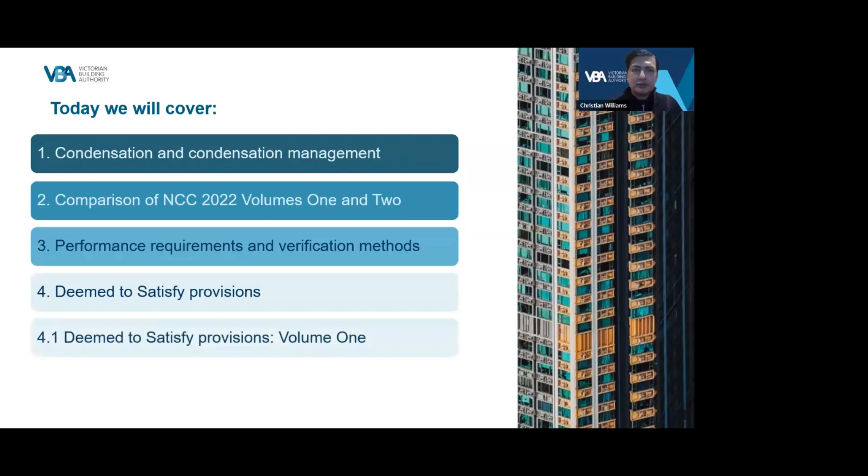Before we take you through the condensation management requirements, we need to mention one of the main changes to the NCC, which is the new SPTC referencing system. To help improve the readability of both volumes, the Australian Building Codes Board, or the ABCB, have come up with what they call SPTC, which stands for section, part, type, and clause, which can be seen on the left side of the slide. Anyone who's familiar with Volume 2 should know that Section 2 used to contain the performance requirements, and those two sections have now been combined into one section called Section H.

Essentially, the aim for this change is to make all volumes in the NCC consistent. To quote an example on the right side of the slide, we know Volume 2 is designated Section H, which is for Class 1 and 10 buildings. Sections are then divided into parts. A section can have multiple parts dealing with different aspects relating to that section. In our example, it's Part H4 to do with health and amenity.

The type can be one of 7 options, as shown on the left side of the slide. This can be the governing requirements, performance requirements, objectives, functional statements, verification methods, deemed to satisfy provisions or specifications. In our example, the type is D, which stands for deemed to satisfy provision. The clause is always a number. In our example, the number is 9. So when I go to that reference H4D9 in Volume 2, it'll give me the deemed to satisfy provision for condensation management.

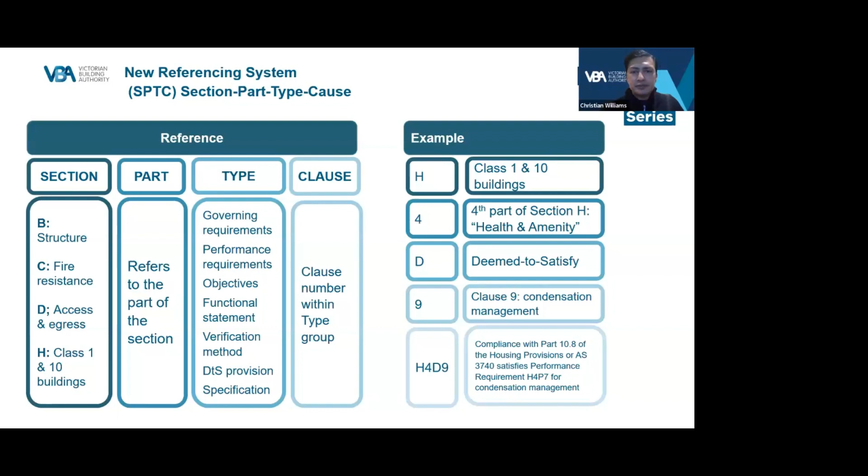For the first part of this webinar, we're going to briefly discuss condensation and its management. Condensation is an event which reveals the presence of water vapour in the atmosphere, and in this particular case, in the context of buildings. The NCC defines condensation as the formation of moisture on the surface of a building element or material as a result of moist air coming in contact with the surface at lower temperature.

When the resulting water vapour from condensation is unable to dry as readily as it forms, it can accumulate to cause problematic wetting in buildings, which can result in the growth of mould or the deterioration of building elements. In dwellings in particular, the daily activities that occur, such as cooking, washing, showering, bathing, and laundry, release water vapour. Furthermore, people release more water vapour into the air just by breathing and transpiration from the skin. All this water vapour accumulates in buildings and needs to be released to assist in reducing the likelihood of excessive condensation. This is because mould growth can be stimulated at relative humidities above 70%.

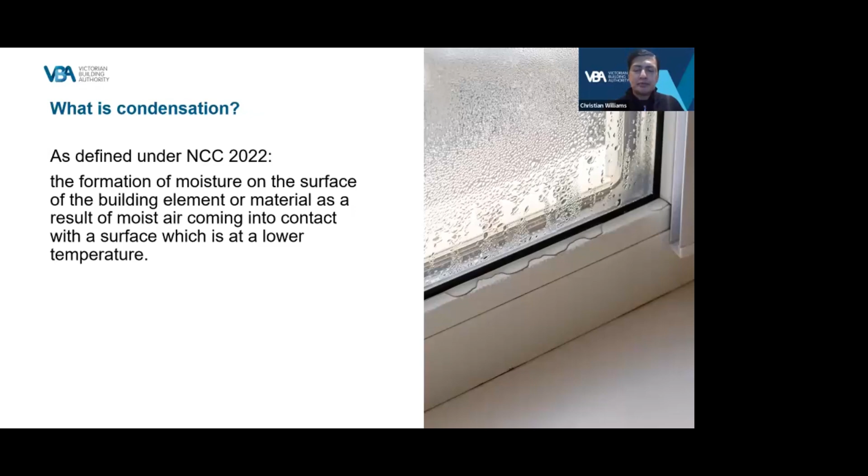With the increase of building sealing in recent times, it has become necessary for the NCC to include requirements to mitigate against the accumulation of excessive condensation. The Australian Building Codes Board, or ABCB, commenced a project starting with the new condensation management provisions for NCC 2019 in an attempt to reduce the presence of condensation and mitigate its effect on buildings. This is a continuing project which is progressively implementing new condensation management requirements to the NCC as more research and information becomes available.

The condensation management provisions of the NCC aim to decrease the risks of condensation and water vapour to the health and amenity of occupants of residential buildings only. The condensation management requirements apply to Class 1 buildings, Class 2 sole occupancy units or SOUs, and Class 4 parts of buildings, and are contained in both Volumes 1 and 2 of the NCC. It is important to note that the installation of a condensation management system may not necessarily prevent condensation from occurring and is mostly in place to mitigate its effects.

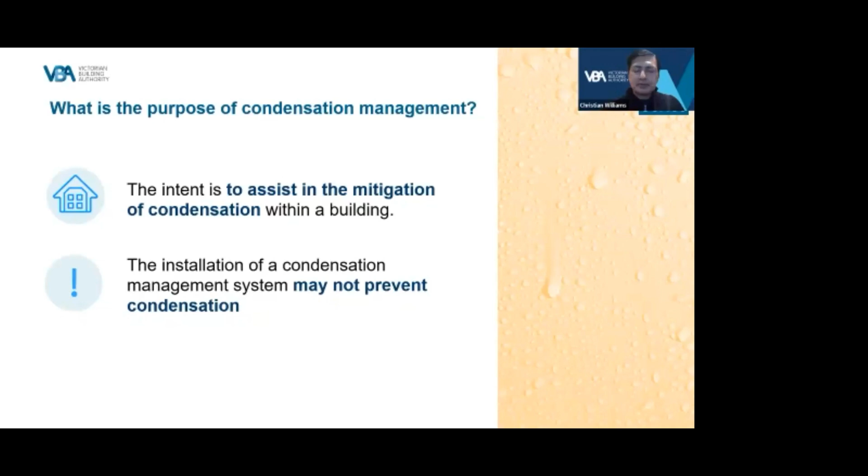Before we get into discussing the changes for NCC 2022, it's important to point out that most of the changes with respect to condensation management are identical between Volumes 1 and 2, but with some slight variation. As most of the changes for Volume 1 and Volume 2 are identical, we will not be going over the changes twice, and we will be covering most of the requirements from a Volume 1 perspective, but also outlining where these changes occur in Volume 2. So for those of you who are only interested in the requirements for Volume 2, take note, as most are the same. However, we'll now provide a brief comparison between volumes, showing where these differences occur.

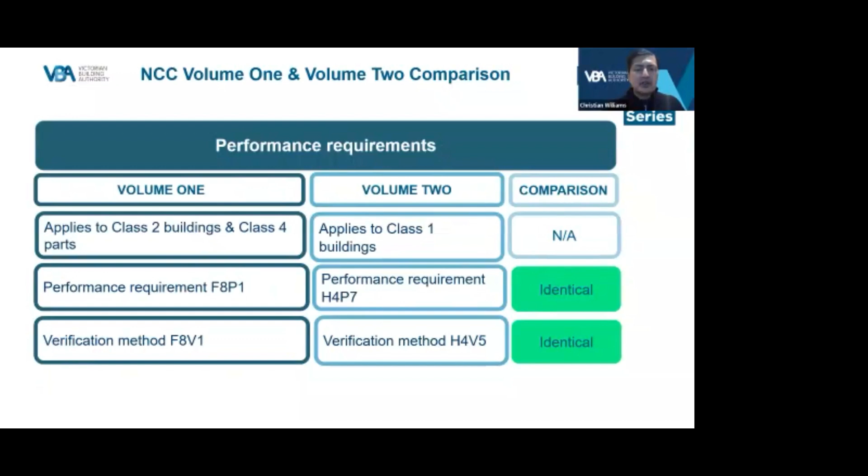The table on the slide compares the building classes, performance requirements, and verification methods of Volume 1 and Volume 2. You can see in the third column and highlighted in green that the performance requirements and verification methods are identical for both volumes for NCC 2022. This table compares the DTS provisions for NCC 2022 in Volume 1 and Volume 2 under the ABCB Housing Provisions Standard 2022. You can see in the first row the requirements for external walls that relate to pliable building membranes, and that the requirements for both volumes are again identical, highlighted in green in the third column.

The second row on the table compares the DTS requirements for exhaust systems for NCC 2022. You will note, as highlighted in yellow in the third column, there are some slight differences between Volume 1 and Volume 2 with respect to the requirements for exhaust systems. The first difference is that under Volume 1, where a space for a clothes-drying appliance is provided, a space must also be provided for ducting the appliance to outside air. However, for Volume 2, you are only required to duct a venting clothes dryer where a venting clothes dryer is to be installed. So basically Volume 2 is reliant on a venting dryer being installed, whereas Volume 1 requires a space for the ducting where a space for a dryer is provided.

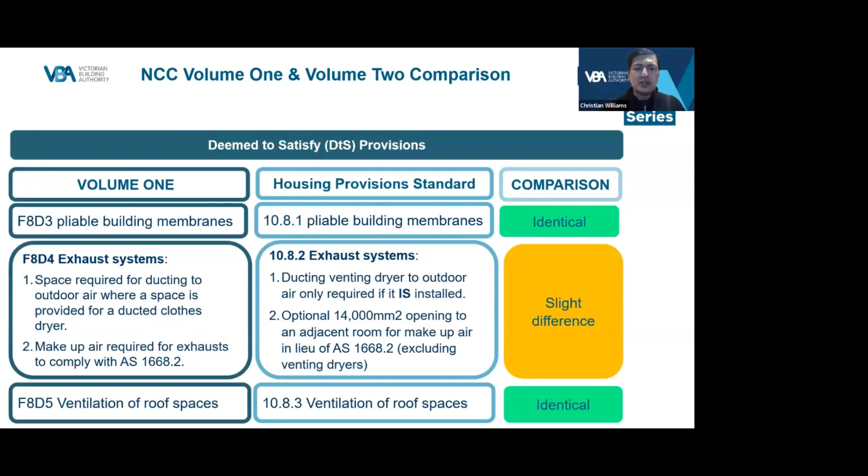We will now discuss the changes for NCC 2022 with respect to condensation management to be adopted on the 1st of May 2024, beginning with the mandatory requirements of the NCC, which are the performance requirements, and then onto the verification methods, which is one of the assessment methods under the mandatory provisions of the governing requirements under Section A of the NCC.

Under Volume 1 of the NCC, the performance requirements for 2022 have not changed much. Condensation management has been moved from Part F6 in the 2019 version to Part F8 for the 2022 version. The new performance requirement is F8P1 under the new SPTC numbering system, as we discussed earlier.

There is again only one performance requirement in Volume 1 for 2022, which has been rewritten slightly for clarity, with a separate application box noting that it only applies to a sole occupancy unit or SOU in a Class 2 building or a Class 4 part of a building. As discussed earlier in the...

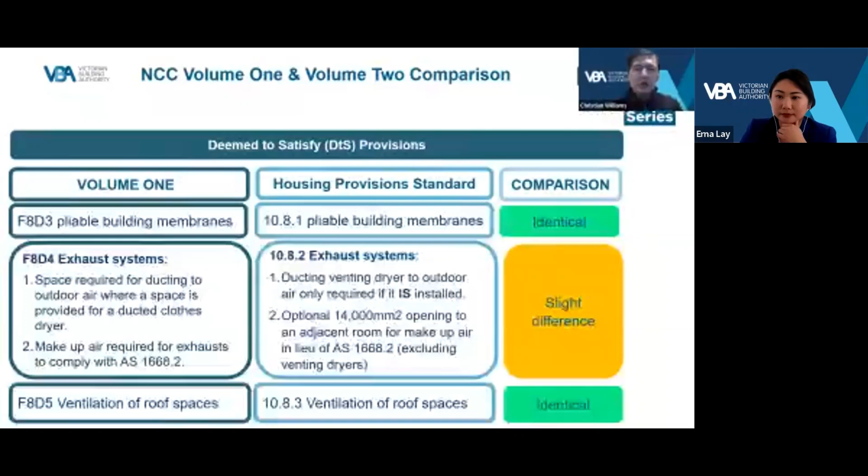Condensation management has been moved from Part F6 in the 2019 version to Part F8 for the 2022 version. Can you just pause it, Nandini? The slide's really blurry. Just play it again. The new performance requirement is F8P1 under the new SPTC numbering system, as we discussed earlier.

There is again only one performance requirement in Volume 1 for 2022, which has been rewritten slightly for clarity, with a separate application box noting that it only applies to a sole occupancy unit or SOU in a Class 2 building or a Class 4 part of a building.

As discussed earlier in the webinar, the performance requirements for Volume 2 used to be contained under Part 2. However, for the 2022 version of the NCC, the whole of Volume 2 is now called Section H. The condensation management provisions come under Part H4. And again, there is only one performance requirement under Volume 2, which is H4P7, applicable to Class 1 buildings only. There are no changes to this performance requirement for NCC 2022 other than the SPTC reference.

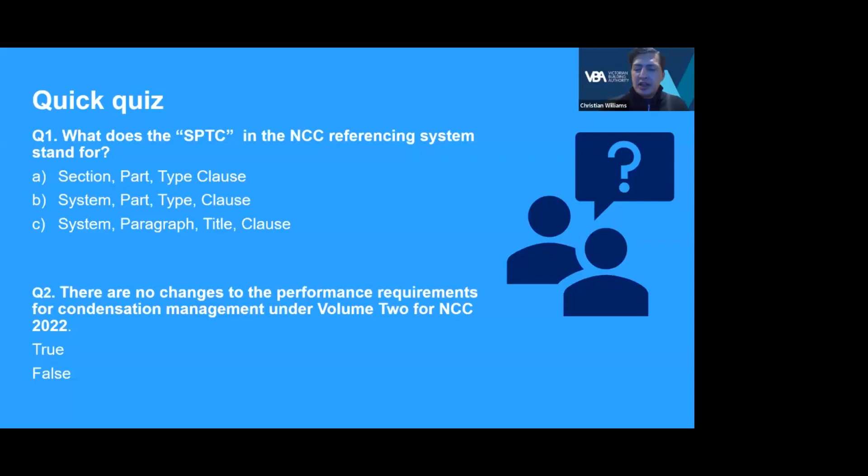So question 1, what does the SPTC referencing system stand for? The answer was A, section, part, type, or clause. Question 2, there are no changes to the performance requirements for condensation management for NCC 2022. Answer was A, true.

We now come to the main part of this webinar, which will discuss the changes to the deemed to satisfy or DTS provisions of the NCC with respect to condensation management. As discussed earlier, as the provisions for condensation management under Volume 1 and Volume 2 are almost the same, we will not be discussing the DTS provisions of Volume 2 in any great detail, and will instead only be identifying the changes under Volume 2, which are different to Volume 1.

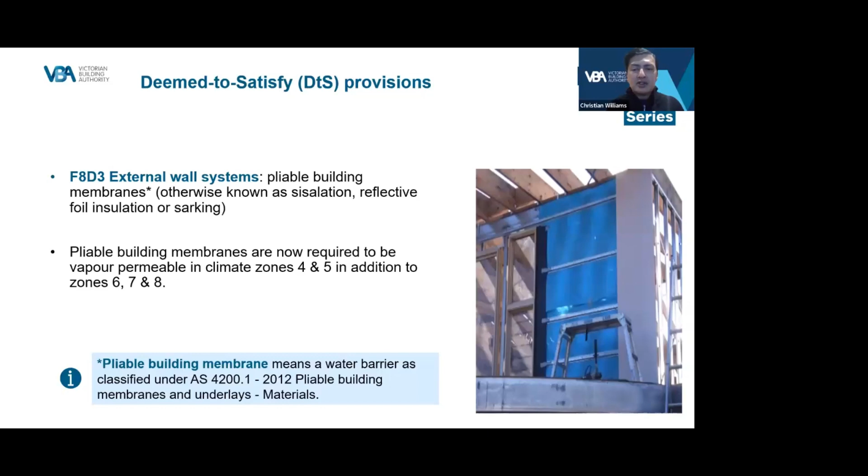For 2022, pliable building membranes are now also required to be vapour permeable in climate zones 4 and 5, in addition to climate zones 6, 7 and 8, which was originally required under the 2019 version of the NCC. So what does this mean for Victoria? We can see in the map on the screen that most of Victoria is in climate zones 6 and 7, as shown in the light and dark blue shading. And climate zone 8 is shown in the white areas. However, there are still some areas at the top of Victoria, such as Shepparton and Echuca, that are in climate zone 4, as shown in yellow at the top of the map. This basically means that a pliable building membrane is required to be vapour permeable throughout all areas of Victoria.

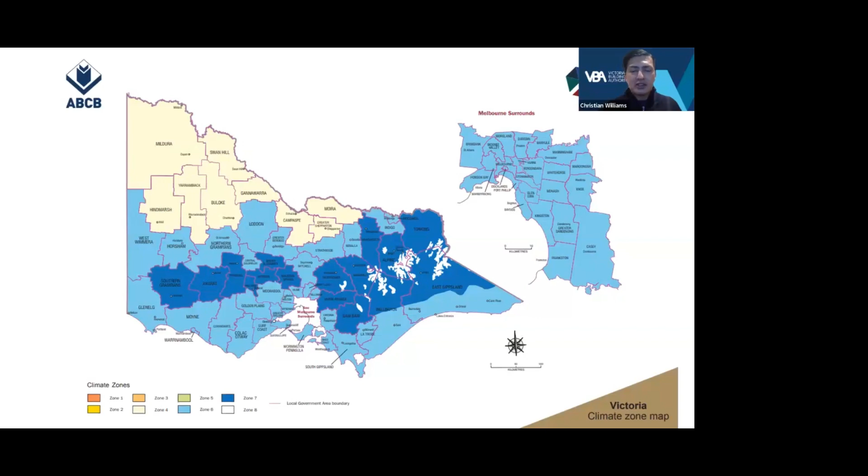The requirements for climate zone 4, shown in the yellow shading, can be met by installing a Class 3 or 4 vapour control membrane as defined under AS 4200.1 and installing it in accordance with AS 4200.2 2012. A Class 4 vapour control membrane will satisfy the requirements for climate zones 6, 7 and 8 as shown in blue and white. The figure on your screen shows a typical installation of a pliable building membrane, which is shown in red, with a direct fix cladding system, which is considered to be the primary water control layer. This example shows a Class 3 vapour control membrane, which would satisfy the requirement for climate zone 4, which is around the top of Victoria as shown in the previous map.

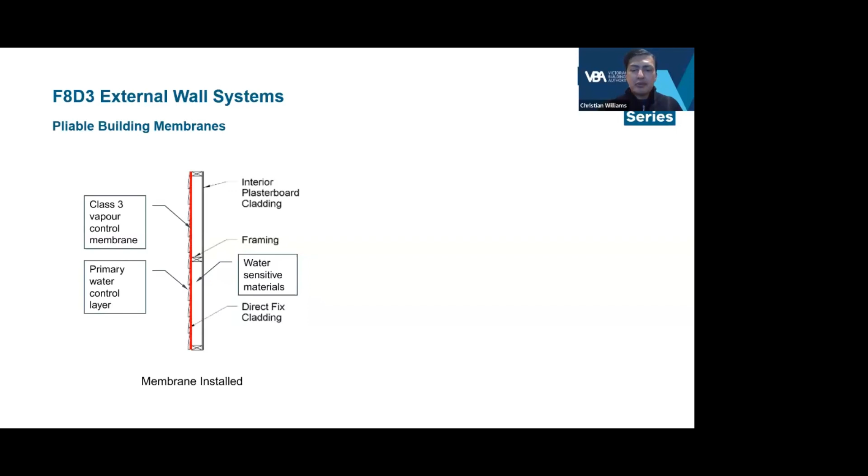Drawing your attention to the second figure on the slide, as a vapour permeable pliable building membrane is required throughout Victoria, where a pliable building membrane is not installed, the primary water control layer, or the masonry in this example, must be separated from the water sensitive materials, such as the timber frame, by a drained cavity. The intent of this clause is to ensure that when no wrap or sarking material is used, a drained cavity is installed between the primary water control layer and any water sensitive materials. This clause is not intended to allow substitutions where untested vapour permeable materials are installed instead of a pliable building membrane. This means that untested vapour permeable materials should not be used, as there is a potential for condensate to accumulate and damage the water sensitive materials.

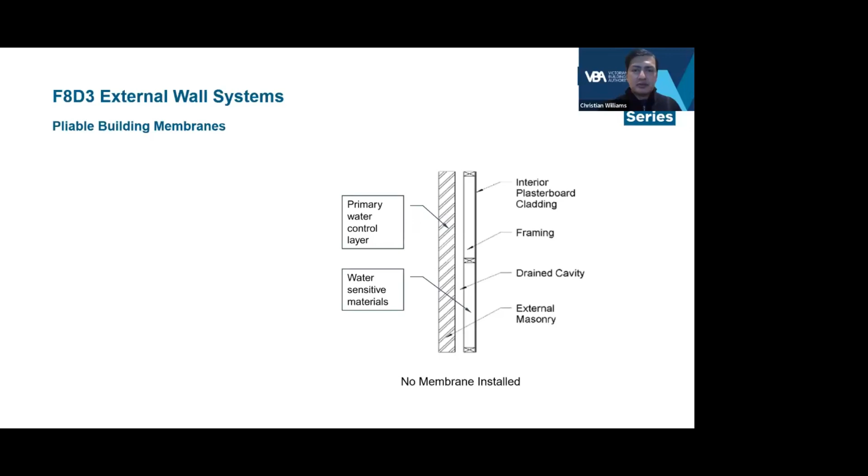There are a number of important changes to note for exhaust systems under F8D4 for NCC 2022. While the flow rates for exhausts remain the same, there are new discharge requirements that apply. Exhausts from bathrooms, sanitary compartments, and laundries can no longer discharge into a ventilated roof space, and all these exhausts, including kitchen range hoods, must now be discharged directly to outside air via a shaft or duct. It's important to note that the installation of exhaust ducts to outdoor air must be carried out by a licensed plumber.

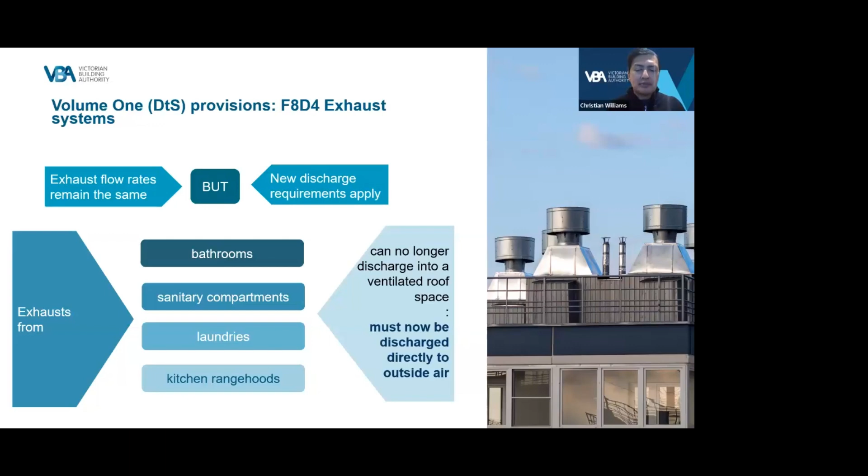Under clause F8D4, where a space for a clothes drying appliance is provided to satisfy the requirements for laundry facilities under Part F4, a space must also be provided for ducting the appliance to outdoor air, and make-up air for the exhaust must be provided in accordance with Australian Standard AS 1668.2 2012, The use of ventilation and air conditioning in buildings – Mechanical ventilation in buildings.

The exception to providing an exhaust system and make-up air is where the room has natural ventilation in accordance with clause F6D7, or where a condensing type dryer is to be installed, as they capture the water vapour as the clothes dry and condense it into liquid water that can be disposed of.

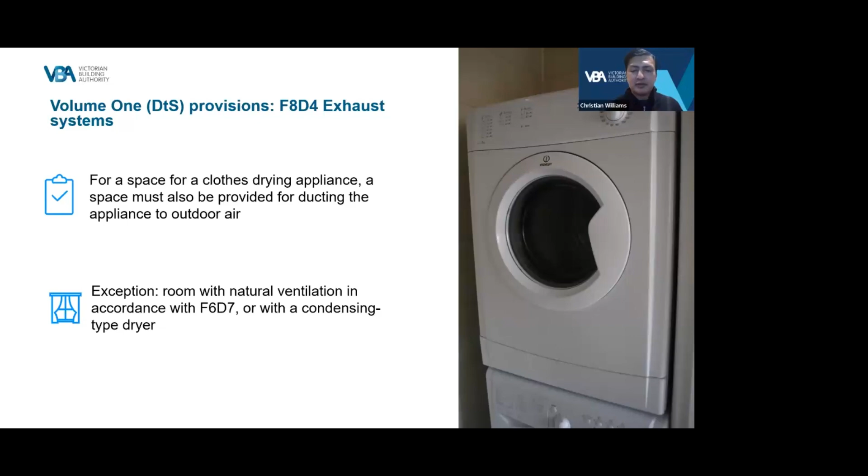The final important change for exhausts under F8D4 is where an exhaust system is used to ventilate a bathroom or sanitary compartment in lieu of natural ventilation, and that exhaust does not run continuously. In this case, the exhaust must be interlocked with the light switch and operate with a run-on timer so that the exhaust will run continuously for at least 10 minutes after the light switch has been turned off.

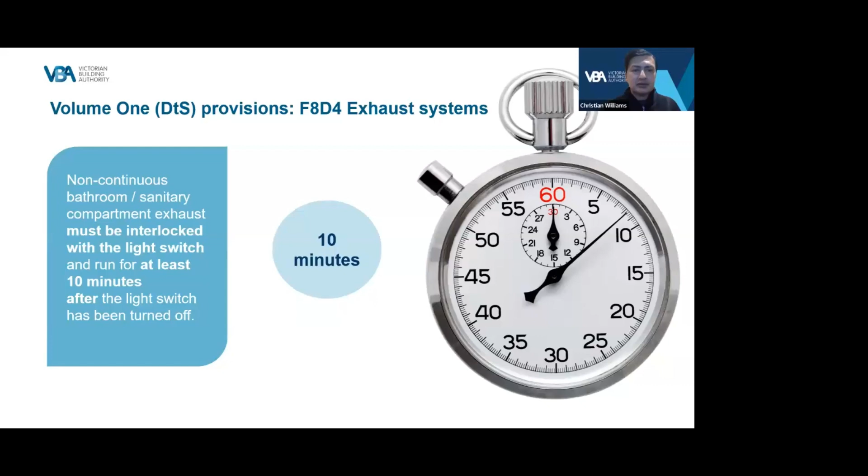The last change under Volume 1 is in relation to the ventilation of roof spaces. Currently, under the 2019 version of the NCC, roof spaces are only required to be ventilated where an exhaust system is discharged into the roof space. However, for NCC 2022, the ventilation of the roof space is a mandatory requirement for climate zones 6, 7 and 8, which is most of Victoria and is shown in blue and white shaded areas on the climate zone map on the screen.

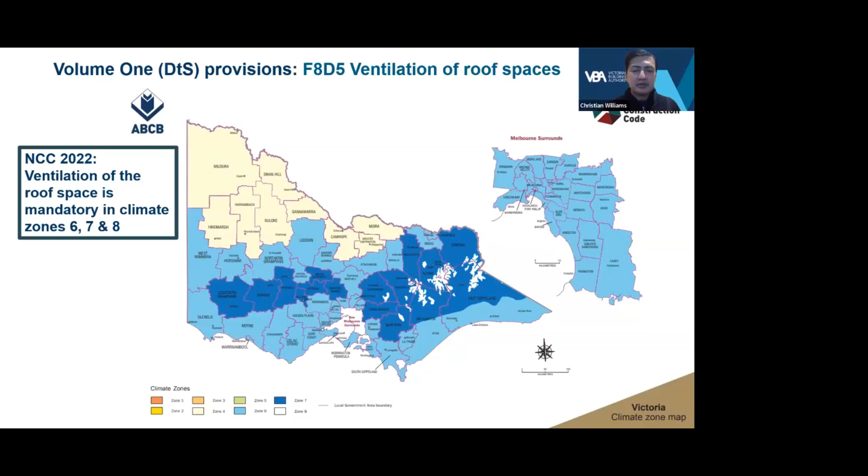Clause F8D5 requires that the roof space must be above the primary insulation layer, which under the definition in the NCC is the most interior insulation layer of the roof, or the roof space must be above sarking, which is immediately above the primary insulation layer, or the roof space must be above ceiling insulation that complies with the energy efficiency requirements under Part J3 of Volume 1.

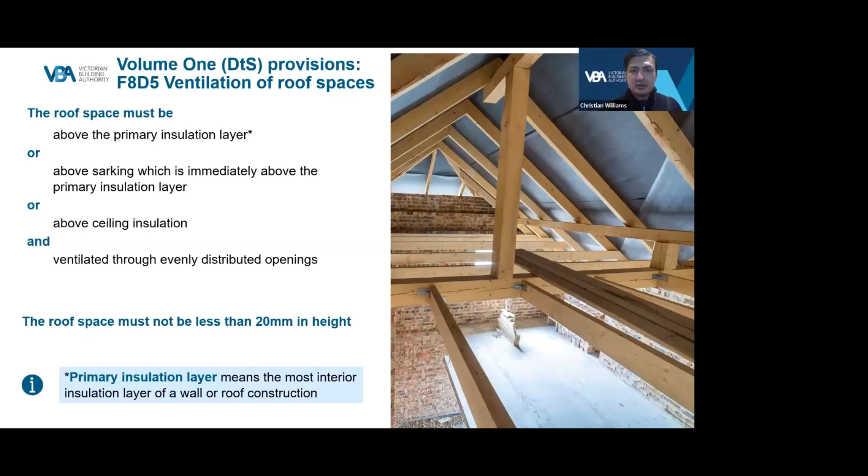The roof space must also not be less than 20 millimetres in height, and the roof space must be ventilated through evenly distributed openings. Alternatively, the roof space may be directly beneath a tiled roof if no sarking is installed, in which case no additional ventilation will be required. The requirement to have a ventilated roof space is also not applicable to a concrete roof, insulated structural roof panels such as reinforced EPS concrete, or roofs required to be built to bushfire attack level FZ requirements.

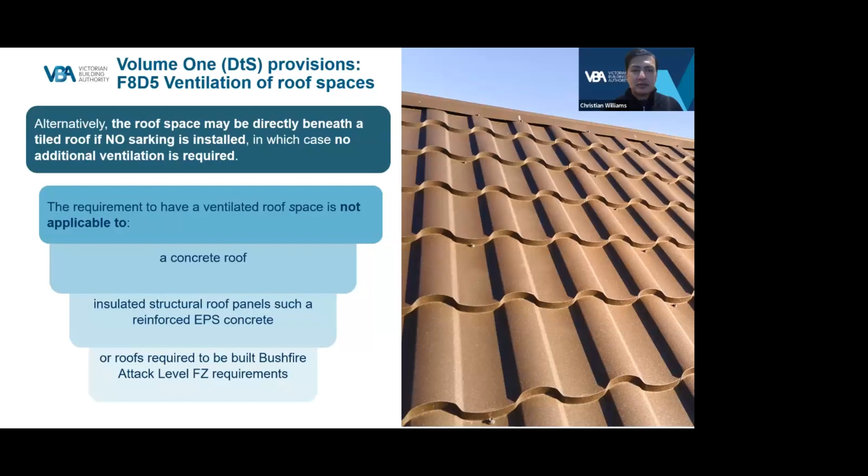Where the roof space is required to have evenly distributed openings, the requirement specifying the amount of ventilation and its placement is based on the roof pitch, as you can see in the extract from table F8D5 on the left of the slide. The figure on the right of the slide is an extract from the NCC, showing that the 20mm gap for the minimum required roof space must be maintained between the ceiling insulation and the roof sarking, and shows a typical eaves vent.

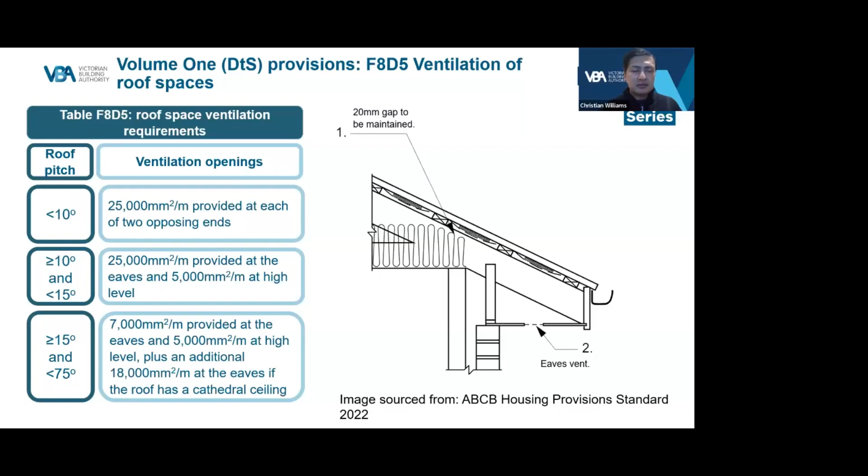We're now going to go through a very basic example of calculating the roof space ventilation requirements using table F8D5 for a roof pitch between 15 and 75 degrees. We'll be using two vent types in this example, as can be seen in the middle box at the bottom of the slide, which are eaves vents and ridge vents for high level vents. These are required to be within 900mm of the top of the roof or the ridge. Please note that the free opening area of the vents will be less than the size of the actual vent itself, as the majority of vents are slotted and only the free area of the vent slots can be used for determining the required ventilation.

The roof you can see on the slide shows a 16-metre long gable end roof with a 31-degree roof pitch. On the bottom left of the slide, you can see the calculation for eaves vents. For a pitch between 15 and 75 degrees, table F8D5 requires 7,000 millimetres squared minimum free opening area per linear metre at the eaves, based on the longest horizontal distance of the roof or the longest side of the roof, as you can see in the figure. We therefore need to multiply the required opening area of 7,000 millimetres squared by 16 metres. This gives us our total required opening area for the eaves of 112,000 millimetres squared.

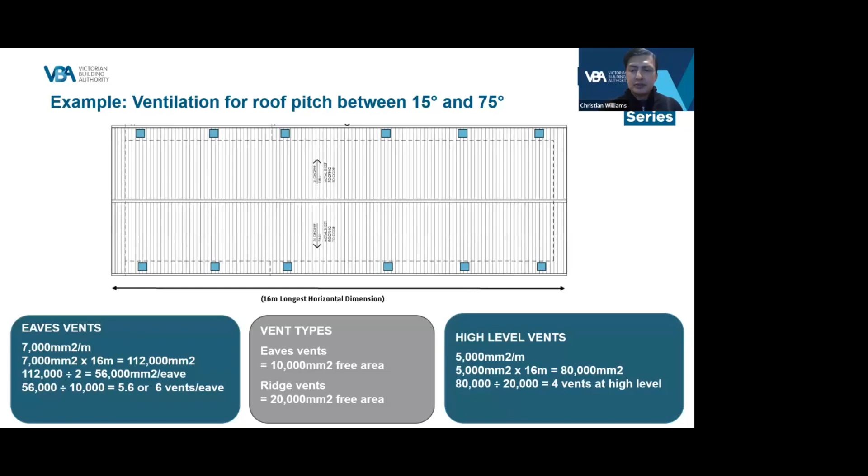This means we now divide our total opening area for each eave by the free open area of the vents to determine the number of vents required, which is 56,000 millimetres squared divided by 10,000 millimetres squared, which gives us 5.6. As we cannot physically divide one of our vents up to 0.6 of a vent because it may no longer be functional, we'll need 6 vents per eave to meet our eave ventilation requirement. Please note that all vents must be evenly distributed.

The same method will need to be used to calculate the high level ventilation required under table F8D5 as shown on the bottom right of the slide. Except in this case, we are using ridge vents, which have a free open area of 20,000 millimetres squared. With the high level vents, they need to be placed within 900 millimetres vertically of the top of the roof or ridge, and we again need to multiply the required area of 5,000 millimetres squared by the longest horizontal dimension of 16 metres, which gives us a total opening area of 80,000 millimetres squared.

As our ridge vents have a free opening area of 20,000 millimetres squared, we once again divide our total required opening area of 80,000 millimetres squared by the vents free area of 20,000 millimetres squared. This will give us 4. Therefore, in this example, 4 high-level vents will be required to meet our high-level ventilation requirement. Once again, these four vents must be evenly distributed.

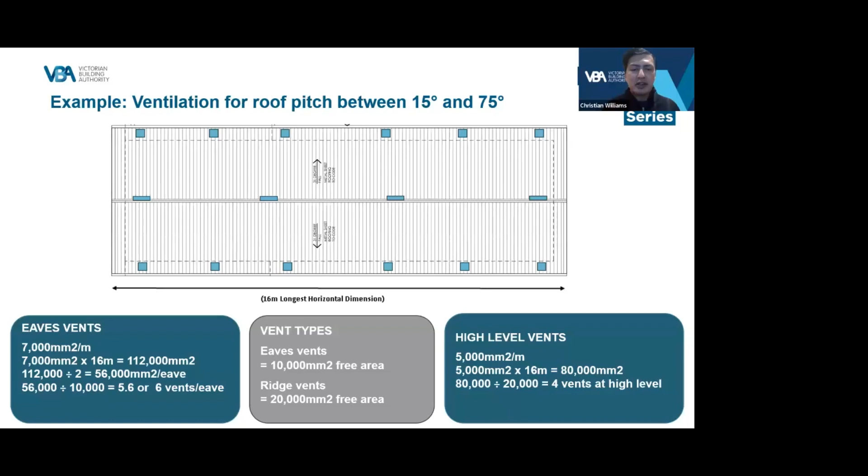We'll now have a quick quiz once again to test all your knowledge. For question 1, under clause F8D4, exhaust systems, how long must the continuous timer run after the light switch is turned off in a bathroom or sanitary compartment in lieu of having natural ventilation? First choice is A, 5 minutes. Second is B, 10 minutes. Third is C, 20 minutes. Question 2. Under NCC 2022, Victorian climate zones will affect when the ventilation of roof spaces and pliable building membranes are required. A, true, or B, false? Let's see how you go with these ones.

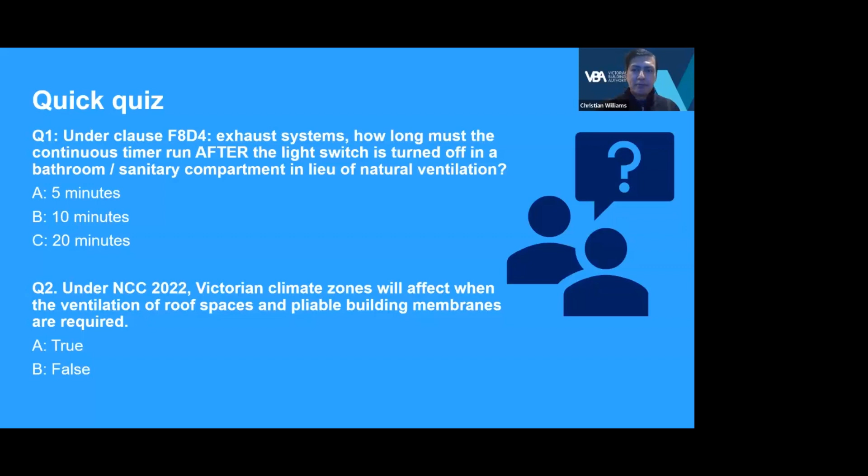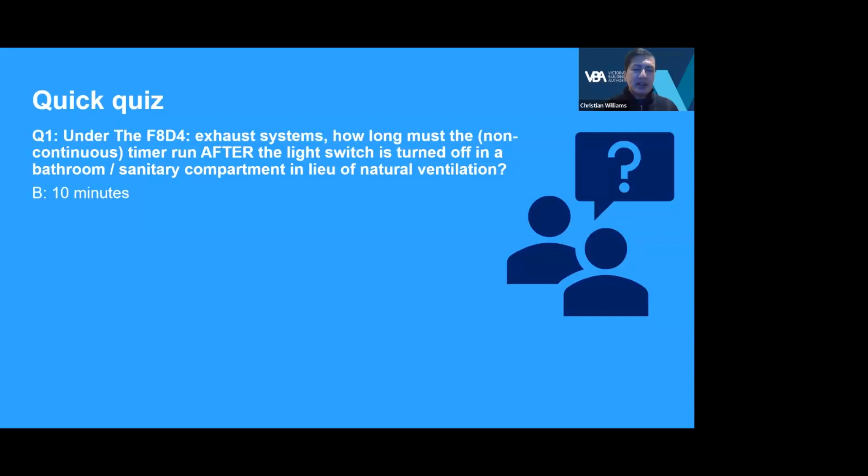So for question 1, under F8D4 exhaust systems, how long must the non-continuous timer run after the light switch is turned off in a bathroom or sanitary compartment in lieu of natural ventilation? Answer was B, 10 minutes. For question 2, under NCC 2022, Victorian climate zones will affect when the ventilation of roof spaces and pliable building membranes are required. Answer was A, true.

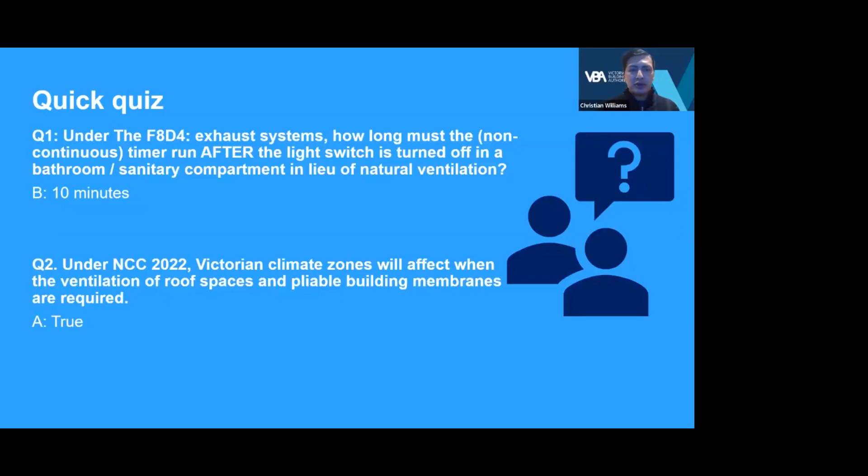We'll now come to the changes to the DTS provisions for Volume 2 of the NCC under Section H, which are specifically contained within the Housing Provisions Standard 2022. We'll cover the changes. However, again, as the majority of the requirements are identical to Volume 1, we'll only be detailing any provisions that are different in Volume 2. Firstly, the DTS provisions for Volume 2 have a different structure for NCC 2022, as noted earlier in the webinar. The DTS provisions for condensation management are now under clause H4D9 of Volume 2, which references Part 10.8 of the Housing Provisions Standard 2022 to achieve compliance.

Clause 10.8.1 of the ABCB Housing Provisions Standard sets out the requirements for external walls and is identical to the requirements under Volume 1, as we discussed earlier. However, Clause 10.8.2 that relates to exhaust systems is almost identical, but with some slight variations. 10.8.2 subclause 3 requires that where a venting clothes dryer is installed, that it is ducted to outdoor air. This is different to Volume 1 as it is dependent on the dryer actually being installed, whereas under Volume 1 it is a requirement, even where only a space is required for a clothes drying appliance.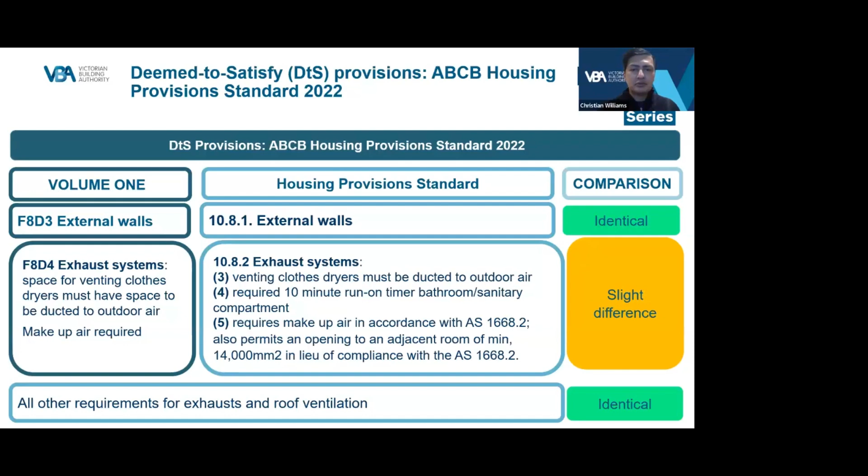So in today's webinar, we've outlined the new requirements for condensation management for NCC 2022, and we hope that this will assist the industry to prepare for the upcoming changes that will be adopted in Victoria from the 1st of May 2024.